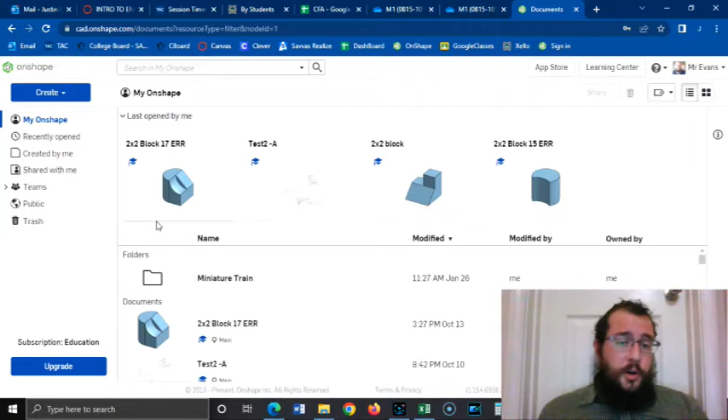I'm going to leave you with something fun to work with, and that is making a part on Onshape. I'm not sure which one I want to give you, but I think I'm going with this one. My expectation is that you'll make this and share it with me so I know you made it. Step one is to start with a block.

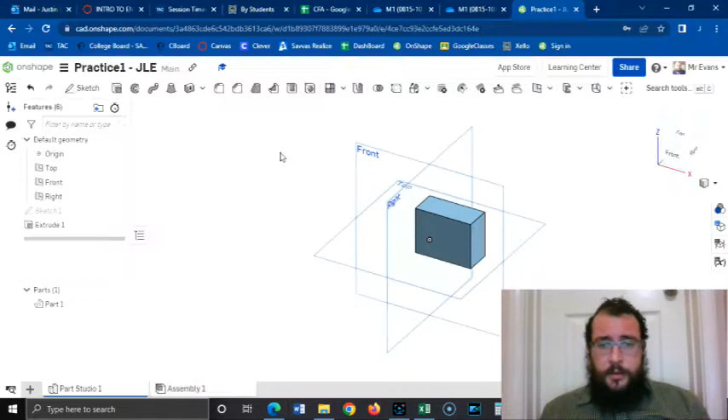The block needs to be 2.25 by 1 by 1.75. That's the overall dimensions, which is what I have right here.

Once I have that block, I only have two features to work with. I have this diagonal cut right here, and I have this circle that's drilled all the way through. I want to make both of those. I can do them in any order, it doesn't necessarily matter. But let's look at the numbers that we do have.

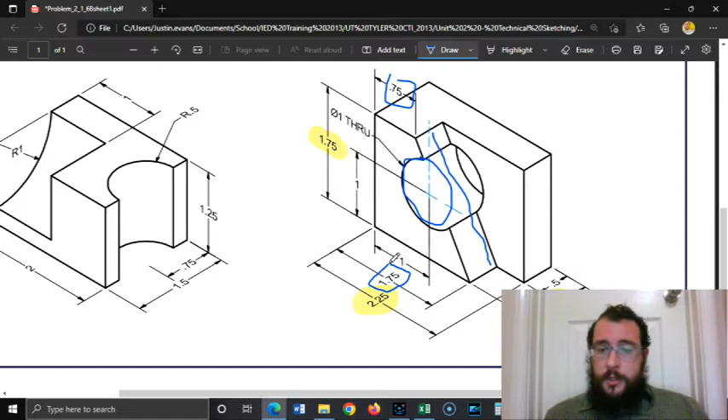We have that the slant is .75 over and 1.75 from the bottom. That's the only thing we know about it. Oh, and how far back it goes - we see that it's half an inch back.

Now we know about the circle. We know that it's a 1 inch through hole, that's the circle right here. And we know that the center of the circle is 1 inch from the ground and 1 inch over. That's where the center is, this X right here.

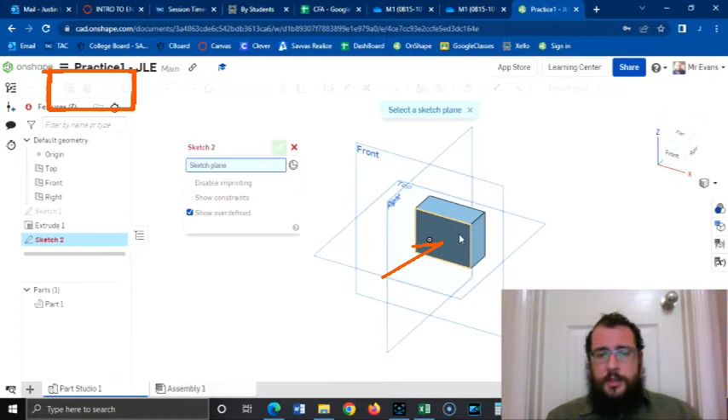That's very badly drawn, but it's all the numbers we need to know. I think I'm going to start with the circle because that might be the easiest one to do. So I'm going to start with a sketch on the face here, and put a center point circle. 1 inch diameter, so I type 1, enter.

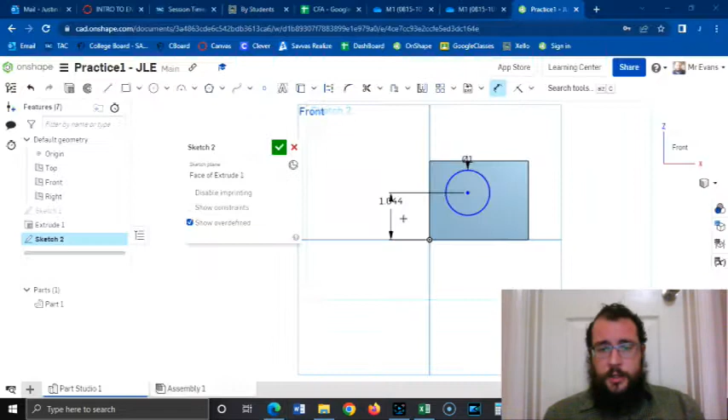Now I need to click the dimension tool, and click the center of the circle and the bottom - that is this one right here, 1 inch. Click the place, press 1, enter. And then 1 inch over from the edge - that's this edge to the center. 1, enter. There we go.

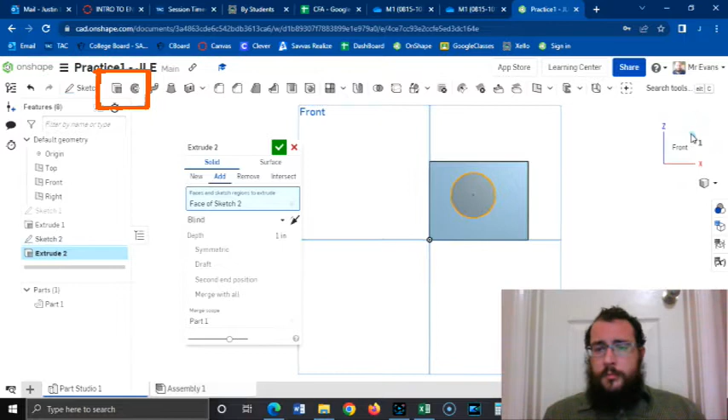And that just needs to be cut all the way through. Look at it to the side, see it's coming out - I need it to remove. So I want it to cut, and 1 will be fine. I'm just going to put through all, that just means it goes through everything that's there.

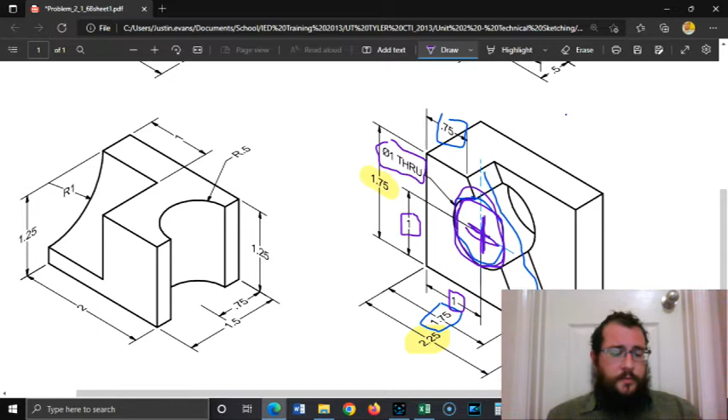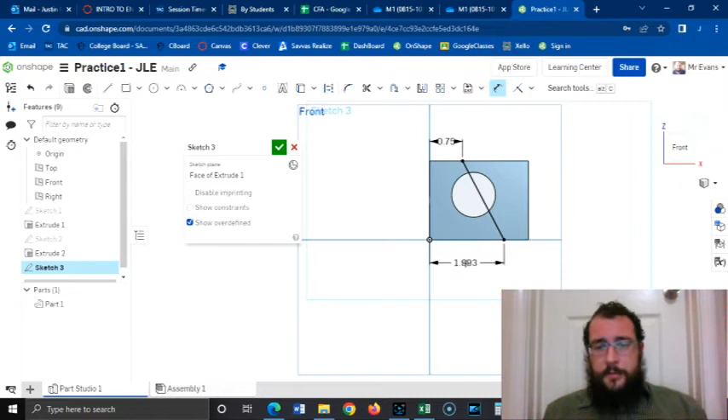My last step, I can only cut from one direction, and that would be this slant - .75 up here and 1.75 at the bottom. So those are the only two numbers I need to really mess with. I'm going to hit sketch, and I want an angle from here to here. I'm just going to put a dimension - from here is 0.75, and from here to here is 1.75. There we go, and that is the two numbers I have highlighted here in blue.

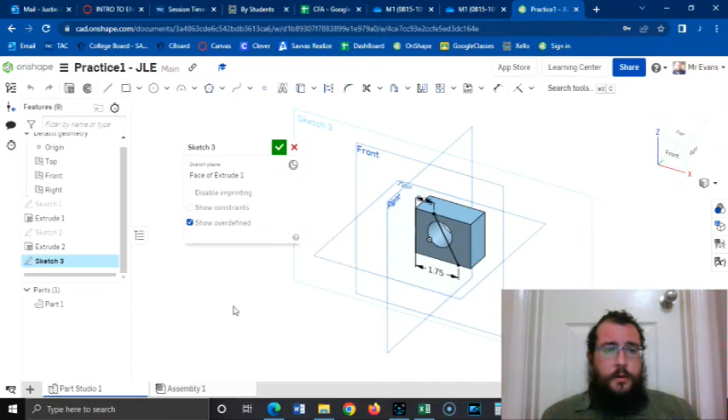The only other important piece, like I mentioned, is that the cut is half an inch in. So let's see if that's enough - we might have to close the shape off. Yeah, it's not accepting it. So I'm opening up the sketch, let's look at it straight on, and add lines here so it sees it as a closed shape and knows to select it. That should fix the problem we were having.

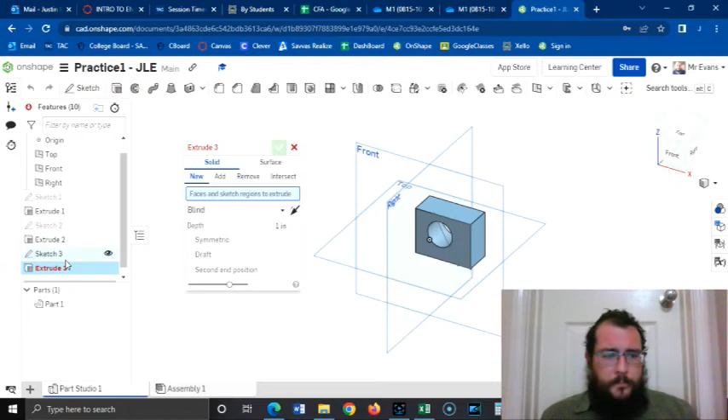There we go, okay, I just clicked on sketch 3, that seemed to work well enough. I want it to be a remove, so it goes into the part, but I don't want it to go through the whole thing - I need it to go only halfway through. And there we go, so there's our part.

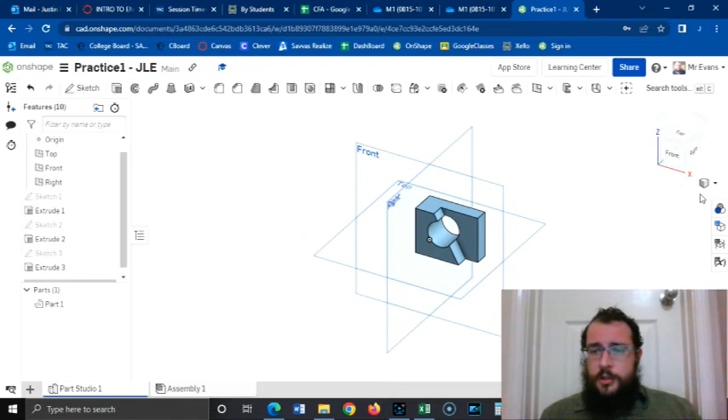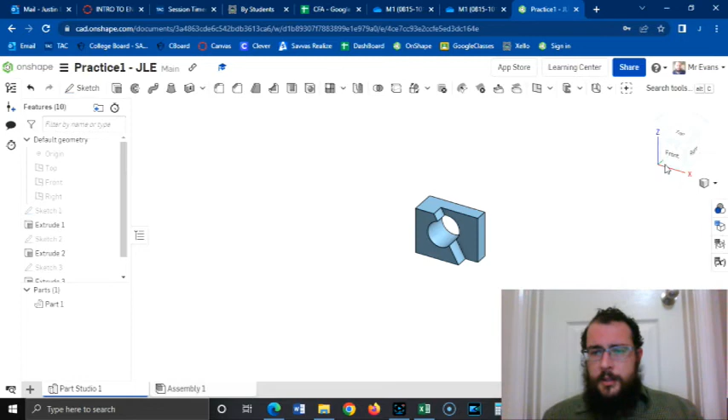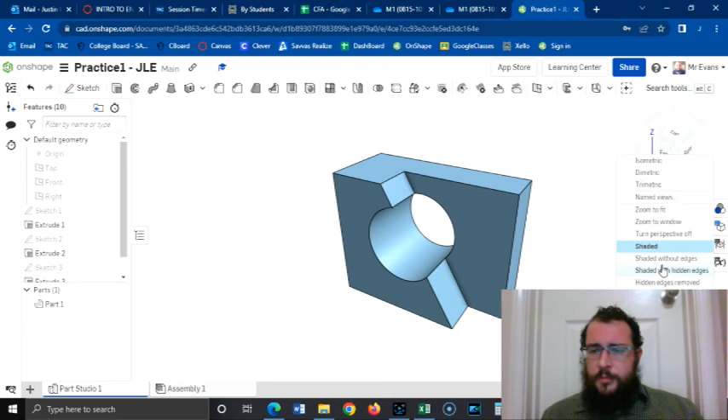Remember I had you draw perspective stuff? There is a perspective setting in here. Turn perspective on - just interesting features. I can turn perspective back off. I can set it to dimetric, trimetric, isometric. There's a few interesting features here.